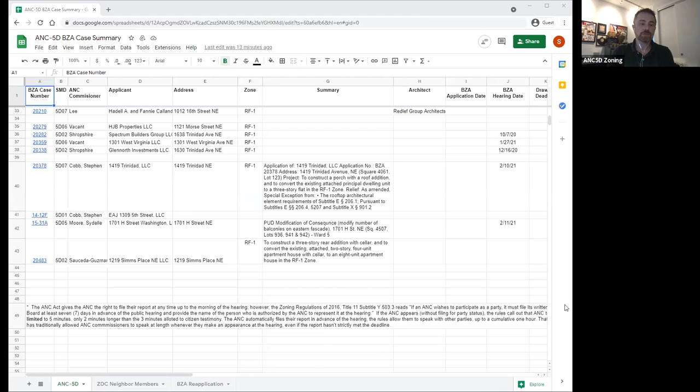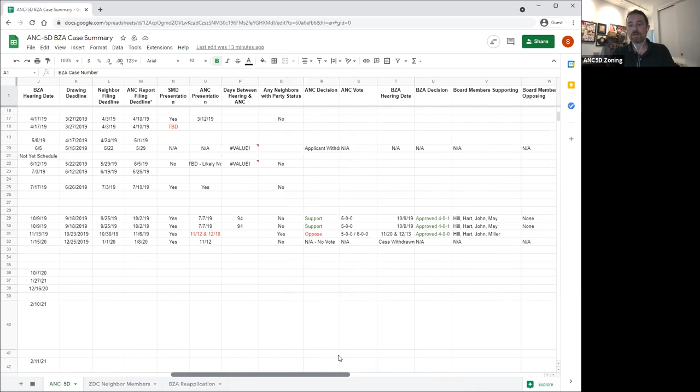So to those of you viewing from home, what you're seeing here is a BZA case summary spreadsheet that we're trying to maintain. There's a link to an old version of this on the ANC's website, but that was attached to a personal Gmail. I need to get that link pointed to this new spreadsheet, which is under the ANC 5D zoning Gmail. Anyway, if you scroll through it, the idea is this is a public thing that shows some old cases, who were the architects, what were the BZA hearing deadlines, what was the ANC status, what was the eventual BZA decision, and board members supporting, opposing, abstaining.

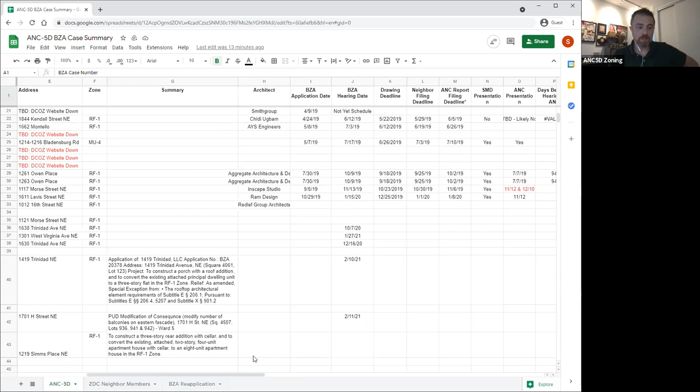Tonight before this hearing, I took a look and there was one new upcoming BZA case in this neighborhood at 1219 Simms. And the way we're doing it, I put a hyperlink right there. If you click on that, we should be able to open that website.

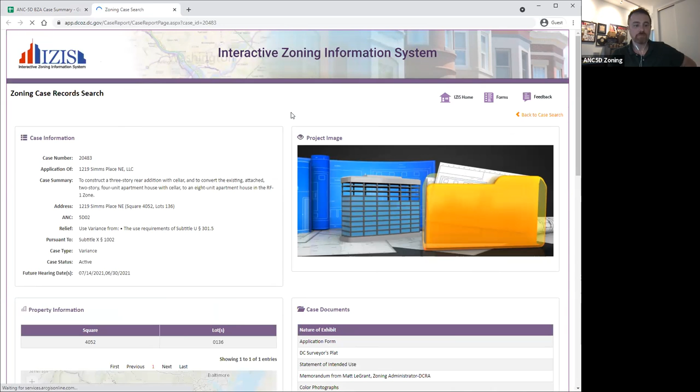Perfect, yeah, we're seeing this. So this is a Board of Zoning Adjustment case, request for zoning relief at 1219 Simms Place Northeast. Shannon, if you want to scroll down, and we go into the case view full log. Now, I believe you'll have to, I'm not sure if you're sharing your screen or just sharing the application. But for those of you at home, you can also go into the zoning committee, and if you go to BZA case search on your browser, you can find this and search for 5D, you'll see all the cases within 5D, and you'll find this in there.

I think let's start with the statement of intended use. Can you click on that, Shannon? And you may need to share the PDF. You might need to share your whole screen so we can view it. If you can open that within the browser, that would be great. Perfect. Okay.

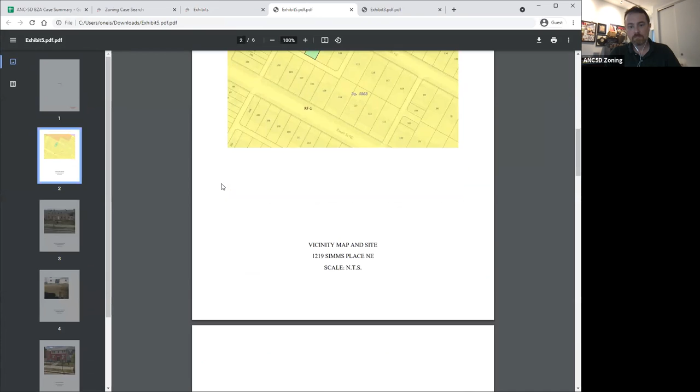And Shannon, would you mind opening the link to the photographs? There was one in the case records, Exhibit 5. That way those of you at home can see. This is currently a 4-flat up on Simms Place Northeast, in the northeast corner of Trinidad. You can see a very typical 4-flat in Trinidad, 4 units.

I think these are just photographs of some adjoining properties nearby. Now, what is interesting about this is they are looking to make an 8-unit apartment house, and that is atypical. Normally, when we see these types of projects, what we see is them doing a dig down, going up, and going back, and then turning the units from 4 one-bedrooms into 4 really nice two-bedrooms. Looks like the case summary reads that it's going to become an 8-unit apartment house.

Shannon, would you be able to bring up the plans so we could see them? Thank you again, Shannon. Would you be able to zoom in a little bit? I just want to see, curious what the layout is. Gotcha.

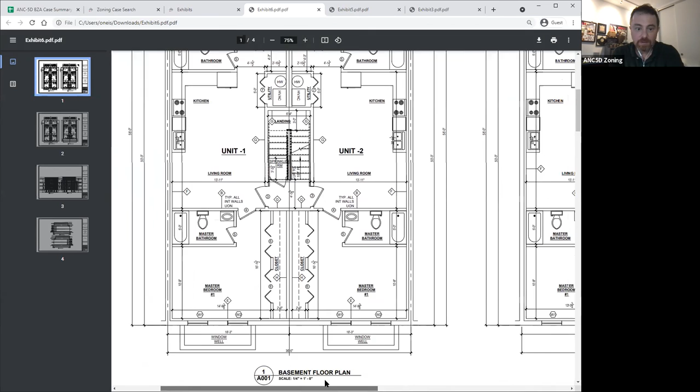So where's the entryway for the building? It's in the center on the lower level. Then there's kind of a central staircase, and then you enter off that main corridor on either side.

But where's the main door? Is it at the top of the page? No, it's on the right side, on the bottom, right in the center. Oh, gotcha, I see. Okay, so you go up that corridor, and on the right and left is the first unit, then you go up or down the stairs for the other units.

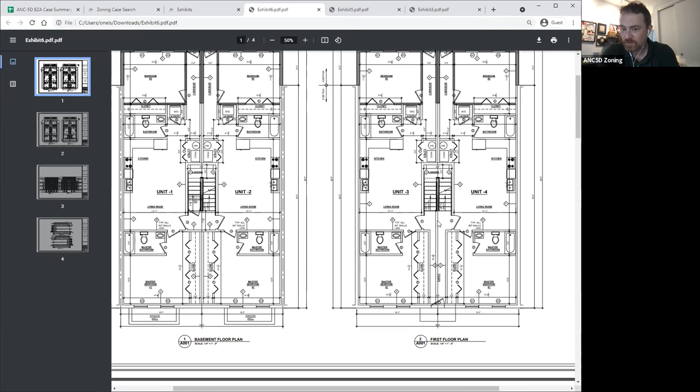So they are doing 2-bedroom units, it looks like. Yeah, 2-bedroom, 2-bath, and they're just stacked. It's one layout that they've stacked all the way up. Interesting.

How long is this building? 58 feet, I think. That is pretty long, not counting the stairs in the back. So that would kind of make sense why we normally don't see this, because I haven't seen other developers do this before. But this seems to be a reasonably long building.

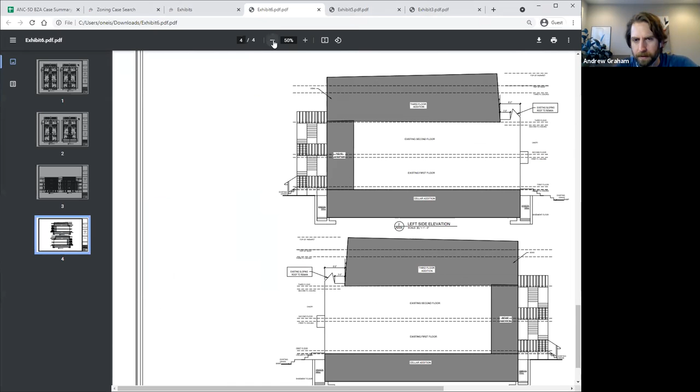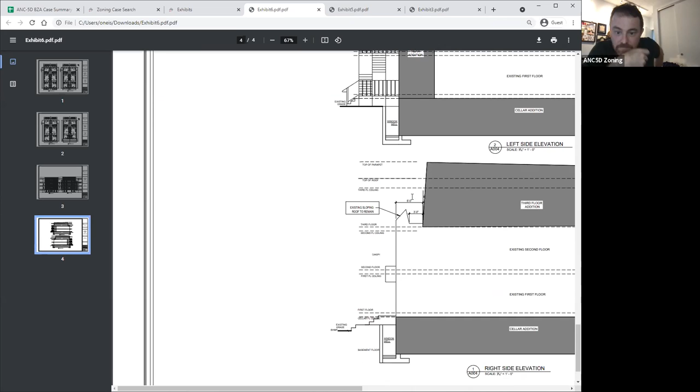Could you scroll to, it looks like the last page has two sections. Looks like the third story addition is set back. Can't quite see it, but is it 6 feet from the original front facade? 5 feet, can't quite tell, yeah 6 feet there. So they're protecting the original slope of the roof line on the block.

Yeah, with a building this big, it's a shame they didn't do slightly fewer units and instead did family size, which would have also perhaps allowed them to get some light into the living space areas. I guess I don't know, is it unclear to me if these are to be condos or to be rented apartments.

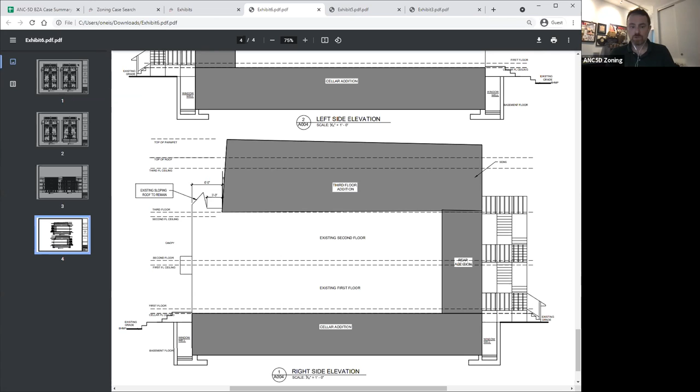You know, there is no shortage of 1 and 2 bedroom apartments and condos being built in the neighborhood. Do any of you know if the existing building, the 4 original units, were 1 bedrooms or 2 bedrooms?

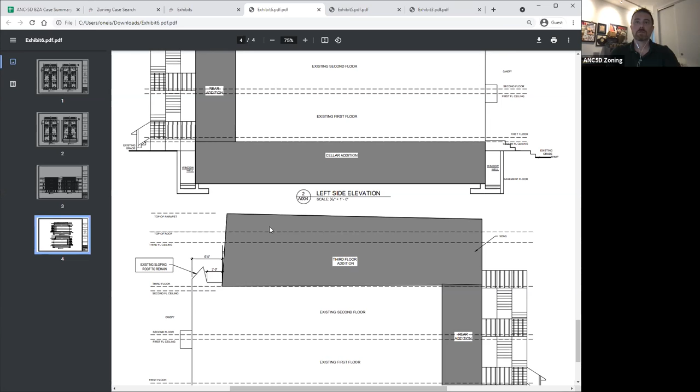Let me have a look. I don't think we can tell from this. Yeah, they don't really have any existing info on there. It was just 4 apartment units before. Proposed use is 8 apartment units.

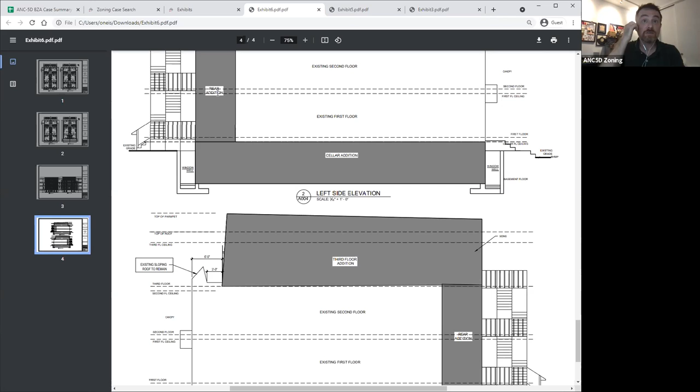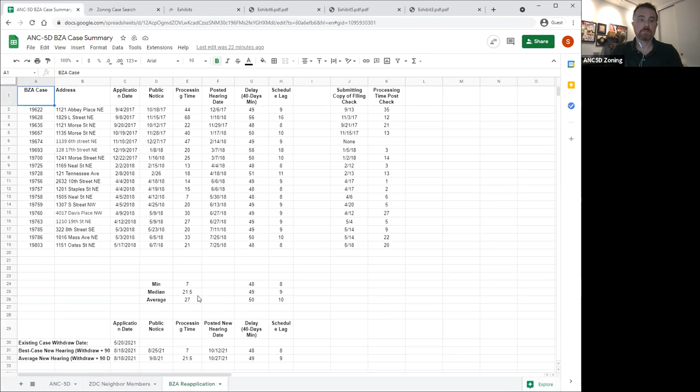So I think at minimum, their BZA hearing was initially scheduled for June 30th, but I believe it's been postponed now to sometime in July. Let me see if I can bring it up. It's been postponed till July 14th.

And just a reminder for everybody, if any of the adjoining neighbors have concerns about this and wish to apply for party status, they need to apply 14 days prior to the original hearing date, which is 6/30. If there are any issues with this, size-wise, light-wise, which are usually the concerns people raise, I can't imagine adjoining neighbors having too many concerns.

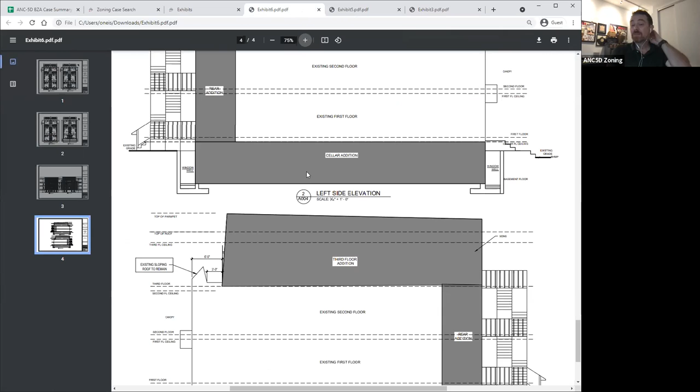I think the building's addition is only going back 8 feet, which seems fairly reasonable, and it's only going up, and we see a lot of these 3rd-story additions. I could imagine people might be very concerned about parking, going from a 4-unit building to an 8-unit building. I don't know how parking is in that neighborhood right now, but that could be a concern the neighbors have.

We have someone else in the chat log. There's a comment from Derek, the panelist: there are some condo developments in the neighborhood that are done well with living areas having natural light. I would consider supporting the density change if the floor plan quality promotes people who would want to live in these condos for many years.

So, yeah, I share Derek's concerns. These are going to be, there's going to be no natural light in the living areas.

I think we need to know who are within the zoning development committee, who are the neighbors? Sorry, who are the committee members for 5D02? This is me. Oh, it's you.

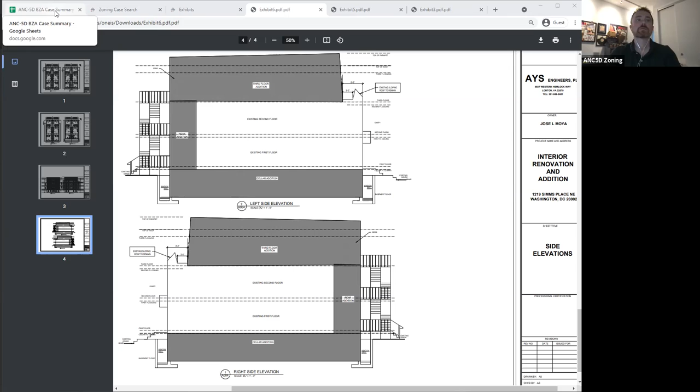Yeah, Marshall, would you mind reaching out to the authorized representative listed in the BZA case and invite them to the next zoning development committee meeting in June? And even that's getting a little late. What's the date for that? Oh, look.

It's June 15, so that's cutting it pretty close considering their hearing is coming up. My guess is a lot of the other neighbors have no idea this is going on. I'm trying to think - I'll send an email to Salvador so he can maybe reach out to some of the adjoining neighbors. I don't know that street very well myself, but just to scope it out and understand if the neighbors around there have concerns.

Are the Trinidad ANC commissioners restarting those joint SMD meetings they used to have? Have those restarted? Yeah, we just had one on Tuesday - that was the second one actually. I thought this past Tuesday was the actual ANC meeting. You mean the 18th? But just two days ago there was a joint SMD meeting. Oh gotcha, alright. Well I missed that, I did not realize they had restarted those. I got it from Zach's email list - that was the only reason I saw it. Oh okay, I need to get on that list, I don't think I'm on that list.

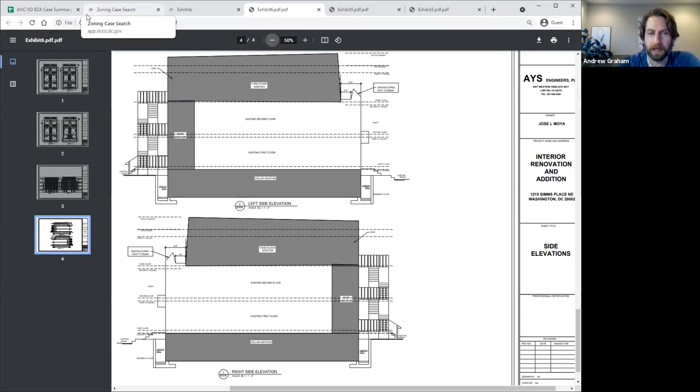Do you mean number of units, or size of the addition in feet? I think it's both. Currently, by right, they would be allowed to expand as long as they have 900 square feet of lot area per unit - that would include the existing units. They would need 900 square feet of lot for the 4, and then to expand beyond, they would need another 900 for each additional unit.

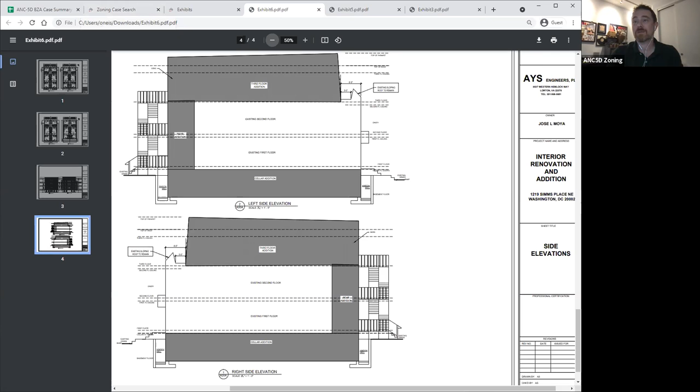I just looked at the survey plat, which is Exhibit 2 in the case record. So the lot is 36.5 feet wide by 102, so that is 3,700 square feet. If you divide that by 900, the general rule of thumb is they want 900 square foot per unit - they're half of that. If you were to do that, they would have gotten 4.1 units.

I think this is kind of a hard sell for an RF1 building like this. We'll often see these proposed for an RA2 zoned lot, but RF1 with 8 units seems like a stretch. In general, I know the BZA really does not care about parking, because there's a lot of issues when parking is cheap - it actually does not promote good public transportation. But I think the neighbors are going to be concerned when what's currently a 4-unit building, where people are probably parking in the back because it's a relatively wide building, suddenly has 8 units.

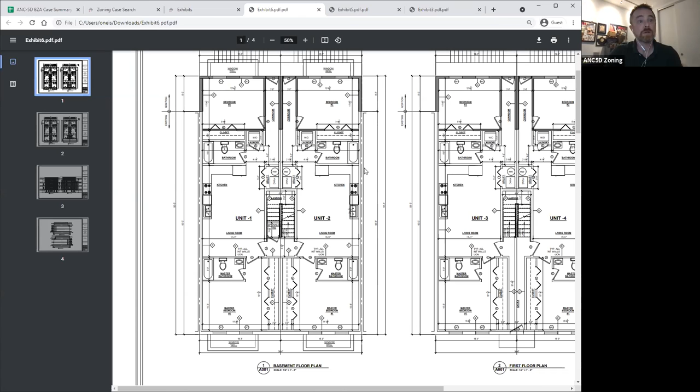That'll become a concern. What was the lot area again, Kevin? It is 3,723 feet, if I got that correctly. I think the survey shows 102 feet long by 36.5.

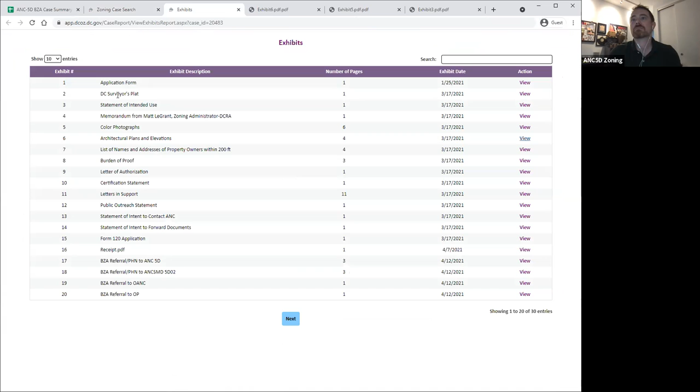Even the place next door to my home, where they had a 21-foot wide lot - well, it was 42 feet wide by 150 feet long - they still just did 4 units. Yeah, dividing by 900, they're at 4.1 units.

So the current building is complying with that 301.5 requirement, so they're looking to double the size of what they're allowed to do. If we translate that to another project type, it's like they're trying to get twice as much as what zoning allows. I can't fault them for trying - it's a free market. I can't fault them for trying to increase their profit margin.

I just wish there were some family-sized units coming out of this, but also, as Derek pointed out, these are not going to be very enjoyable units to live in. I don't care how much granite and stainless steel and nice things they put in here, there's going to be no natural light. Maybe for the very top story units they could put in some skylights, but everyone else, especially in the cellar, these won't be very friendly.

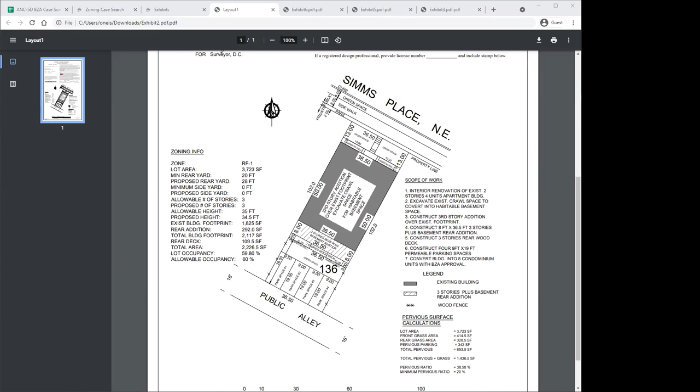Are there any other concerns? Is that the only zoning relief they're looking for? That's what it says - that's the only thing, and they seem to have everything else I can think of off the top of my head, but it is a pretty large ask, really. Yeah, I've never seen anyone ask for that much.

So all we can do is let the ANC commissioner know. This case is coming up very fast, and I don't know if they've already reached out to us. I think Commissioner Guzman may have reached out to me a few weeks ago about this - let me take a look. Yes, he did, in fact - he reached out to me about 3 weeks ago, and it's just fallen off my plate. I need a better process so we can jump on these things.

So yeah, we need to talk to Commissioner Guzman and just let him know.

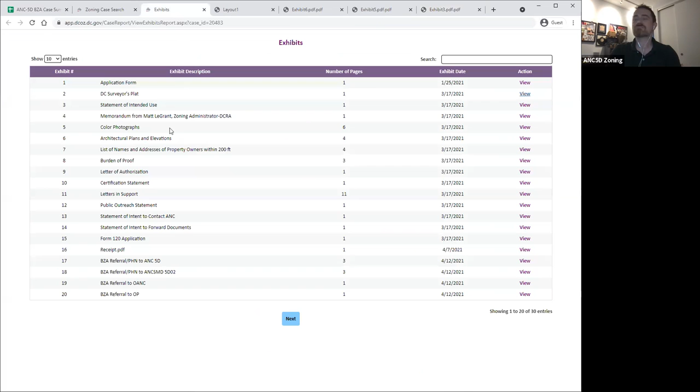I was looking in the case file - shouldn't they say why they need the variance? This is the thinnest burden of proof statement I've ever seen. Normally the applicant's statement could be a 16-page long document, and all I can find is this Exhibit 8, and it's barely 2.5 pages, and that includes the signature line. The burden is on the applicant to prove they need a variance, and it can't just be because they want to build more units.

Yeah, I don't - at least I don't see it. I mean, it's quite common when they've actually got quite a few letters of support in here already, but of course they're all form letters where literally somebody just filled in their name. I view those as having all the weight of a feather. There's literally just form letters where they probably knocked on doors. Of course, we can go look at them later.

I would personally hate to see this building built and replicated, because it's not the intended purpose of the RF1 zoning.

I agree. I like the idea of renovating this building type, and I've seen it done pretty well on a few streets around here, but I think doubling the size is not within the intent. And Derek brought up a good point that this is almost like a PUD, or we would want it to be thought of more like a PUD, where we would ask what benefits are really coming back to the community with this kind of project.

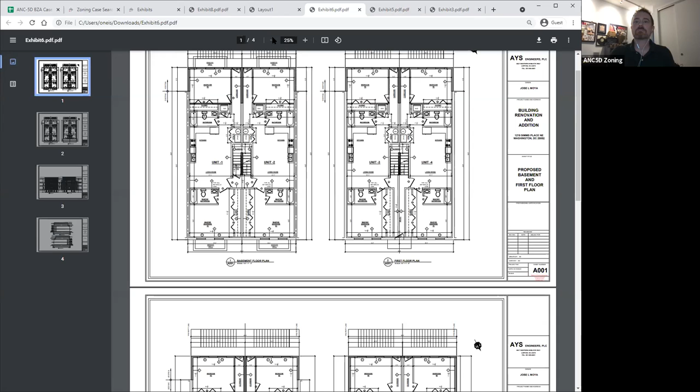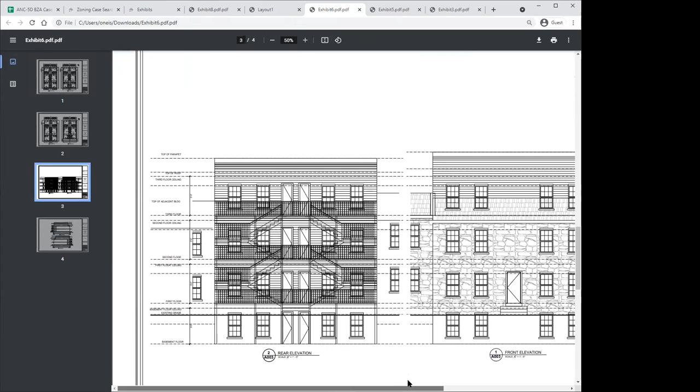Yeah, well, I'm glad we dug into this this evening. These are small units. Kevin, yes, I would like to ask a question, because I was listening to you talk about the small units and no lighting. Shouldn't the size of the units or the size of the bedrooms and lighting be like a requirement?

I think there are building code requirements for minimum room size, yeah. And the lighting requirements are for natural light or artificial light, except in bedrooms, which they do have. And there are minimum room sizes—Andrew, correct me if I'm wrong, is it 70 square feet with a minimum dimension of 7 feet in one direction? I think 7, but if it's a bedroom, I think it's actually more.

Actually, I think you're right, I think it is 7. Other room types can be smaller, like a bathroom could be smaller, and a kitchen technically could be smaller because you're not doing the same thing in that type of room, but there are minimum requirements for the bedrooms. So you could technically comply with the building code and do what they're proposing to do.

So it's the natural light—it's a little bit of, if they're providing the natural light in those two spaces, the bedrooms, using the light well in the cellar, they are complying with the requirements, even if we don't like it. The more I look at this design, the more I hate it, because they have a kitchen but no living room or dining room. There's literally no space to live.

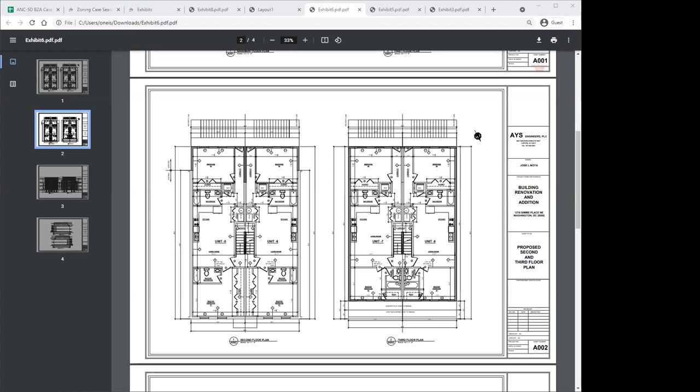I'm all for increased density as well, but there's a much higher bar for variance versus special exceptions. So I am surprised that when I look at what they have submitted in the case record, they really have not shown the hardship. It is a very thin justification. It just seems like they're saying, hey, this is what we'd like to get. They haven't really justified why they're requesting a variance.

If they had figured out some way, if they were asking for, say, 6 units, where some were family size and some were 2 bedrooms, that could work. But to go for all non-family size units, I know this neighborhood is seeing a reduction in family size because there's a lot of matter-of-right developments being done in Trinidad, Ivy City, and Carver Langston, where existing family sites are being converted into multiple 1 and 2-bedroom units. So we're absolutely seeing a net decrease of family size, and it's very rare that the bigger projects ever yield 3-bedroom units to offset that loss.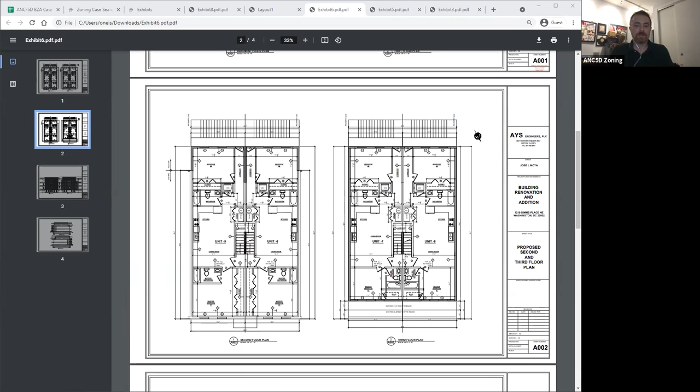I think we have discussed this a fair amount. These meetings normally last an hour and a half, but if we don't have other upcoming BZA cases, I don't want to keep people here unnecessarily. I think this was a really good discussion. I'm going to reach out to Commissioner Cecilia Guzman this evening to let her know some of the concerns, and we'll take it from here.

Marshall, were you going to email? I think it's Alex Salah, he might be listed as the authorized contact. Yeah, I'll reach out, and at minimum invite him to present at the next zoning committee meeting as well as the next ANC meeting. In fact, I think this needs to be discussed.

I wish I'd invited them to this particular meeting, that's my mistake. I wish we had invited them to come and present this evening, but at minimum I think we need to invite him to the next ANC meeting, just to be respectful of their time. If they need to make changes, I want to give them as much time as possible before their July hearing date. I think their hearing date is July 14th.